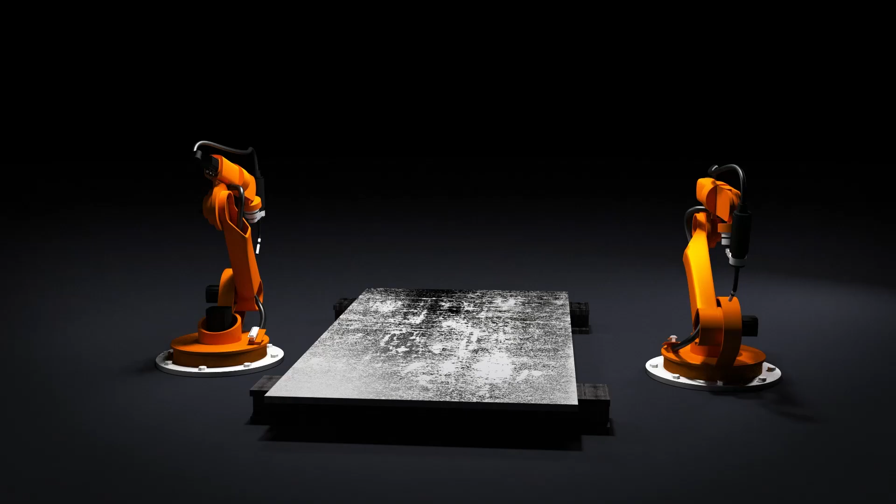All right, it's go time. Spa sign at the Agua Caliente Cultural Plaza.

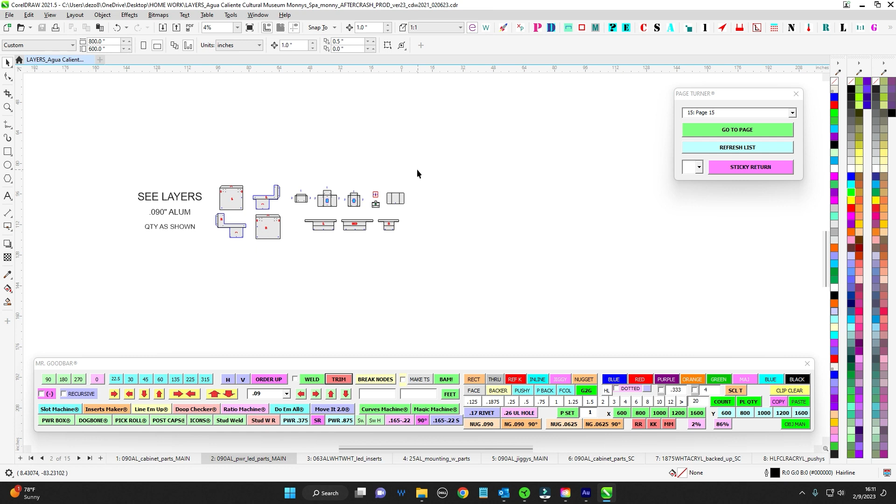Let's get it cracking, do some lay of the land. We've got the frame parts, 090, nothing too crazy there. We've got some new kind of weird power stuff I'm going to go over, some weird little LED holders, and a switch birdhouse. Just keep an eye out for that.

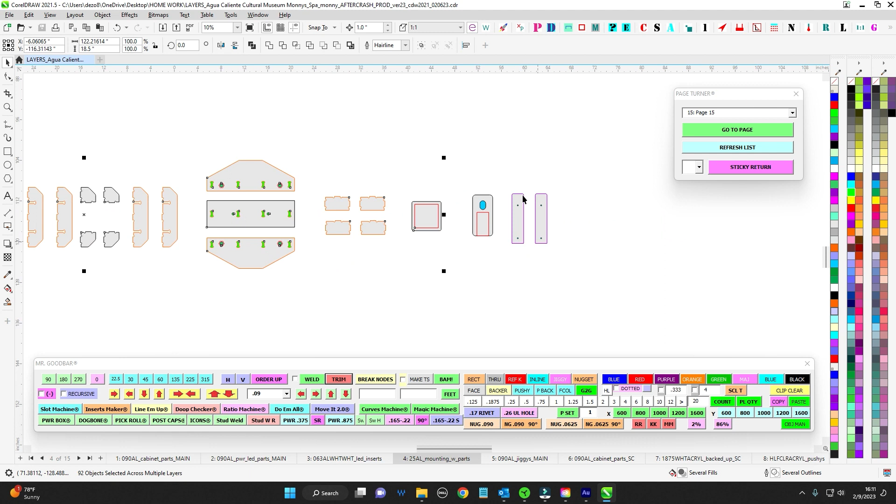We got some 063 white, only need it inside the one part. We've got basically the base parts here, then we've got a lift point, and then a couple of little guys for holding on the little sidecar there.

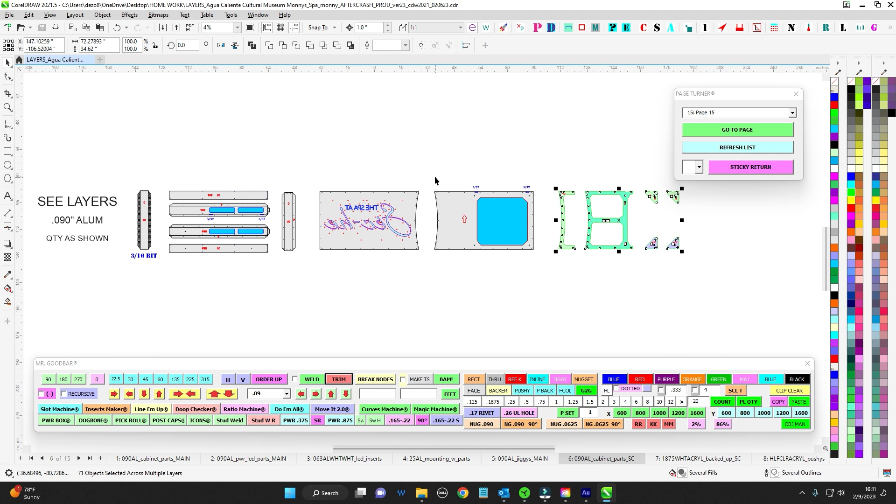Keep an eye out for those, we got a separate page. This is just the jigs for the main box, and then the sidecar slash, it's almost like a blade sign, that's what I'm calling it, both there. But you got everything you need for this - you got your jigs here, your skins here, all on this page. You got the frame parts, keep an eye out for those.

And then the blade sign sidecar is going to be backed up plex, so it's just white acrylic, that's all you got to worry about there. And then the actual cabinet, the letters there are push through, so you got 1/2-inch pushies for the cabinet. And then of course get these to first shop.

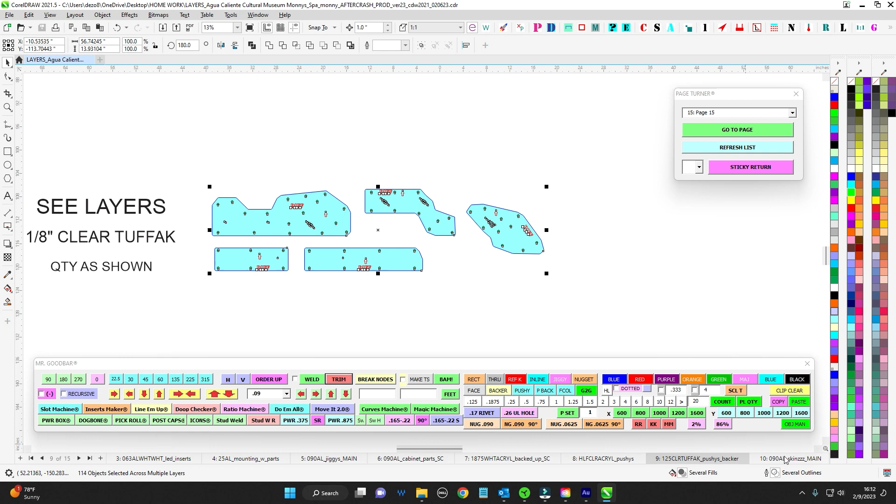You got your polycarb backers there, and yes, I'd like them to be 1/8 inch. I went ahead and put the skins for there because they're one piece, got the skins for you for the main cabinet. And then the top little logo is trimless, little trimless can, and the 3/4 inch clear like we do for that trimless stuff. So let's get into it.

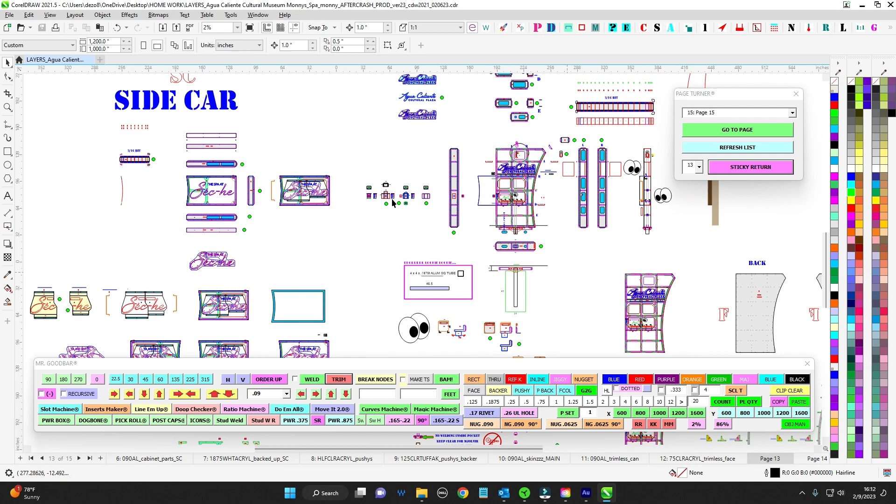So I always say, yeah, I'll try to go over it and make it short, and then I don't. But I believe this one is going to be pretty good, we're getting really good at this, so it's not too much weirdness. It is asymmetrical, so it's only single-sided - some of the stuff is different on the front than it is in the back.

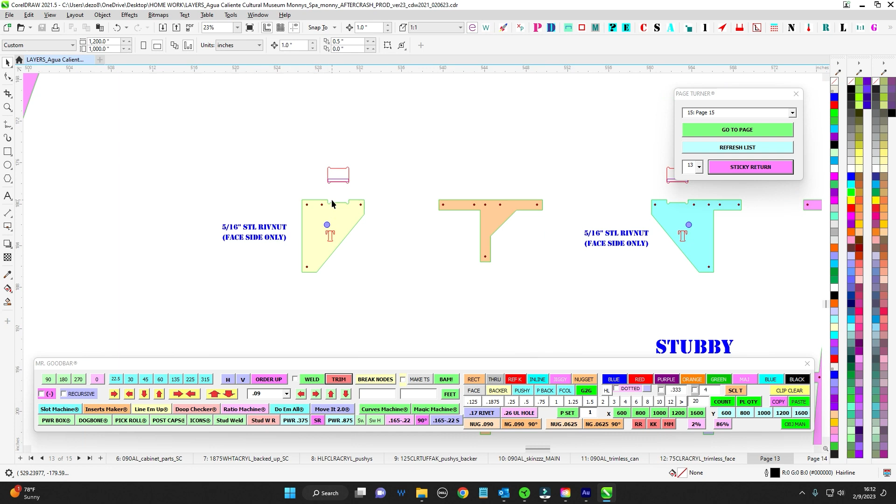I try to make the jigs universal though, so you'll have holes for riv nuts on the back that you won't use, so don't bother. And then like the notch and stuff for that is not going to be there, so don't worry about that.

And while we're here with jigs, you've got two little stubby guys - so you have these ones here, the kind of tan color. Those are all the same size, but you have two stubbies in order to clearance this curve. So just look for a notch right here, and that'll give you your stubbies. The notches and stuff will let you know the difference.

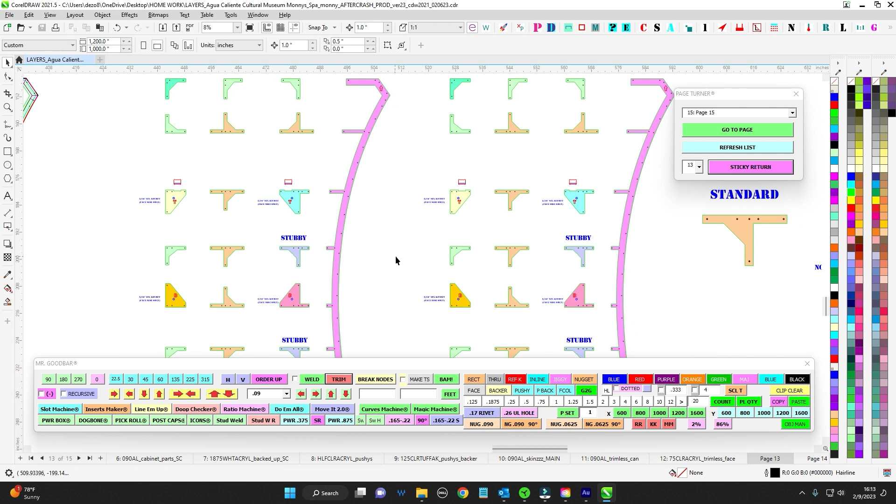Eventually, once we figure out the technology to get colored aluminum, then we can route the color of the aluminum to correspond to my pictures, and that way it'll be a lot easier. But for right now, we don't have any pink aluminum or purple aluminum, so just look for the notch on those, but otherwise it's all good.

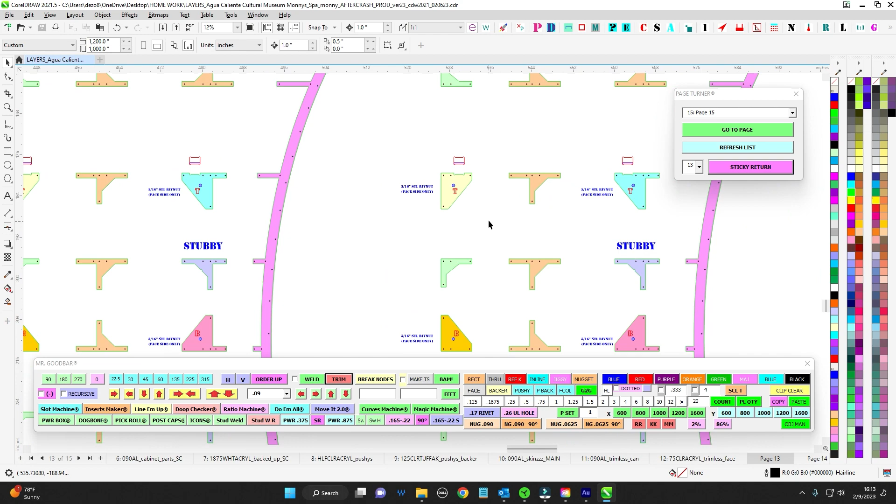But like I said, on the face side, you'll do your riv nuts, but don't worry about the back. That way you wouldn't accidentally put the wrong one in the wrong spot. So that's all, the frame is the frame - you guys are getting really good at that. So go ahead and just construct the frame, but leave faces off for the moment, but get that all done.

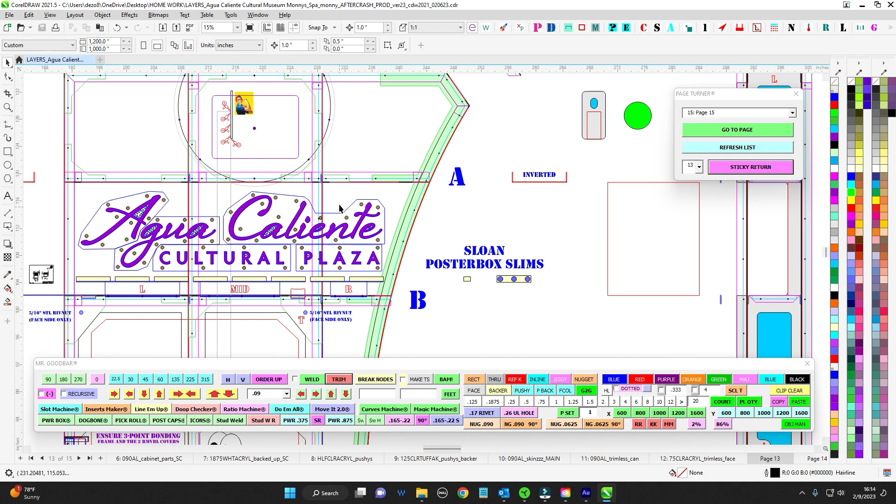Sort of like the Loma Linda Monument, I kind of made a cavity here that will exist in this spot right here. So that way just the back has the thing for the lords, and then the front, you'll have a front cavity that'll be completely open for the pushies. So that's where that is.

And then you'll have the openings on the skin, but that's basically where all the power is going to go and stuff like that. Make your birdhouse like you do, and go ahead and lords it or tack it to the inside, and then that's good. And then get that frame done.

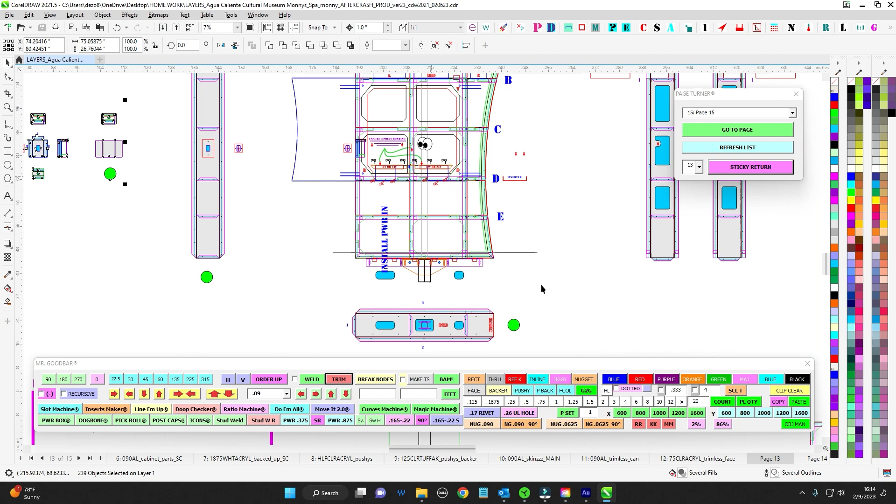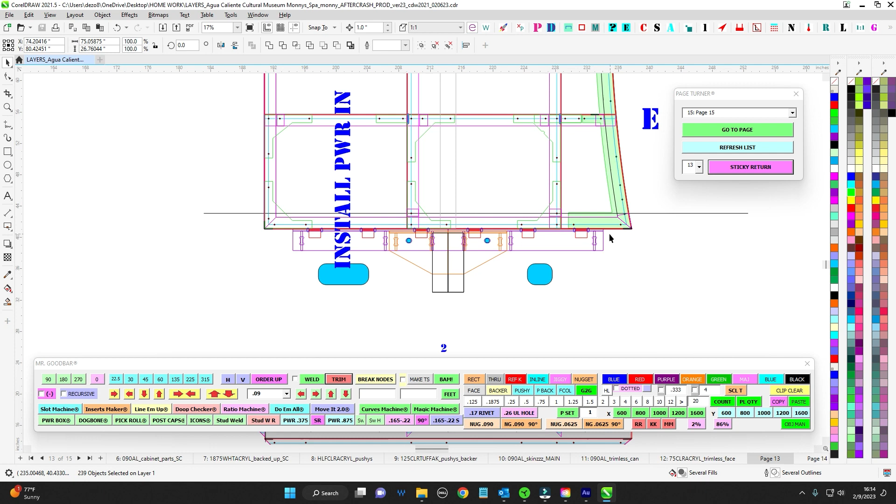And then you're going to make sure that the lift point is burned really well, and it's going to be a single stick of 2x right up the middle, and then you're just going to burn the lift point. So you want to make sure the lift point's burned on there really well, so that way it's nice and strong.

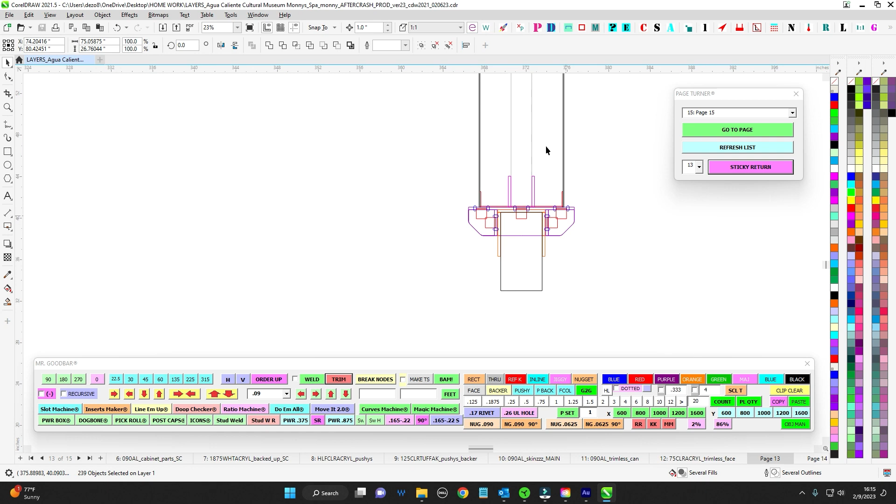Just like that, and that's going to go all the way down, and then you're going to burn it really well to the base plate. And by then you'll have the frame made.

Go ahead and lords that to the base, and then the base, how low can you go? That'll just stay on there the whole time, around the shop and everything.

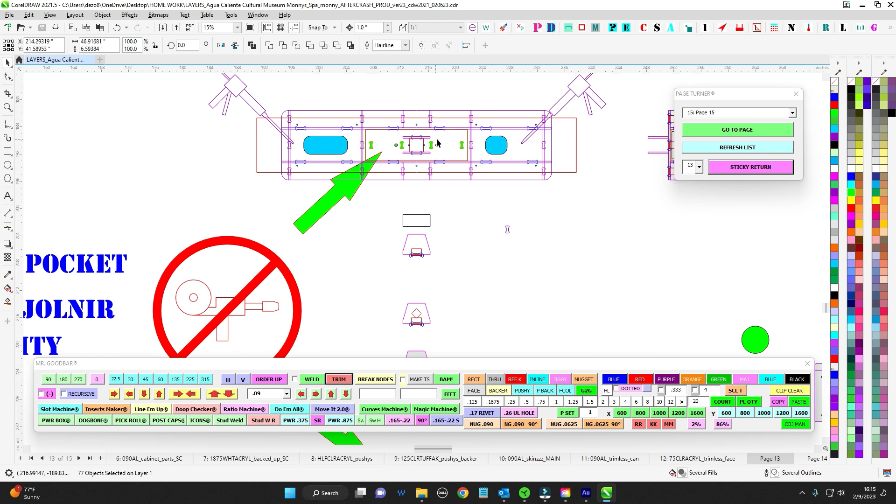So, and then the Mjolnir, you'll actually just weld that together. You got 1/2-inch nuts, but again, make sure you don't weld in the pocket. Keep the pocket clear of welds, make sure there's no weld boogers when you're done, make sure it's clean. That way install can slide that up in there and be done with it.

Yeah, so permanent base, stick up the middle, all good.

Oh, I just realized I'll owe you, I got the cut sheet here, but I owe you this stick here. So I'll get that laid out. Looks like it's 88. But yeah, I'll go ahead and get that for you.

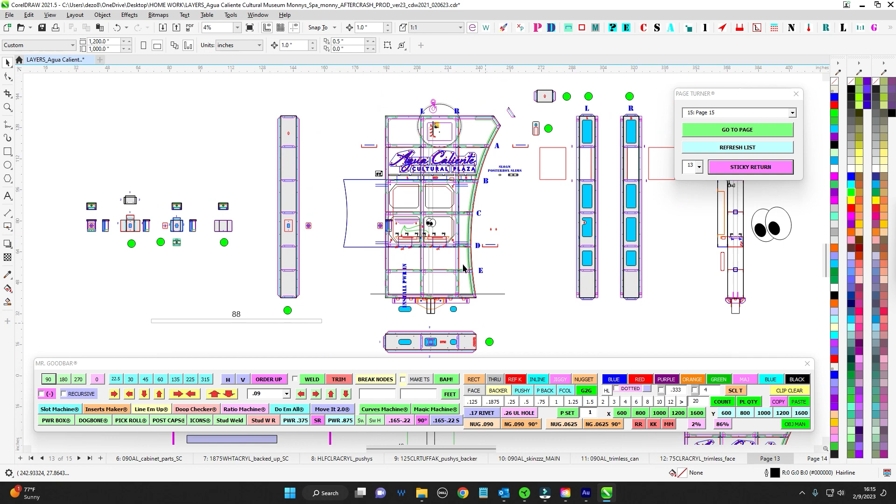So make the frame, all that's good. Now this guy here, you can make this completely on its own. It's, like I say, it's a 5-inch deep box. Got a little curvy over here, but otherwise it is symmetrical.

So the back has a big old opening for you to be able to slide in all your LED stuff. This will also allow access to certain things. You'll see what's up. The face, again, is shoot studs.

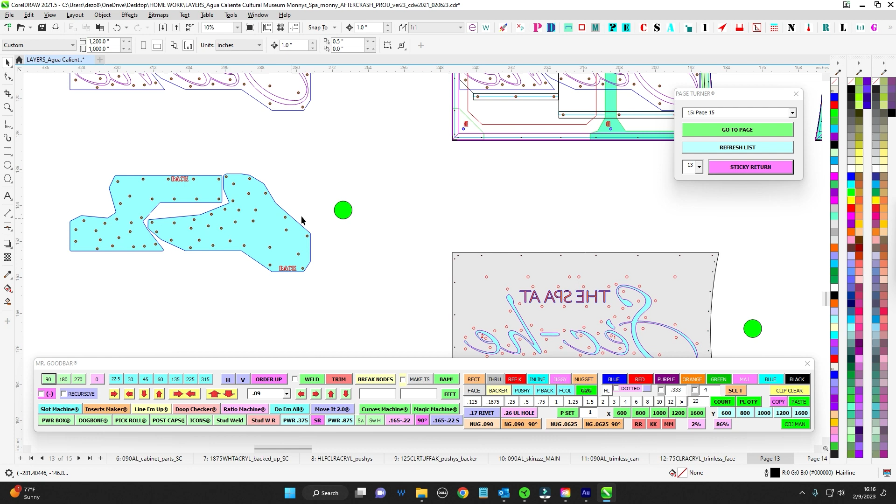This is backed up Plex, so it's just white Plex. Don't have to do anything to it, but keep it clean, no scratches. And then the top row of studs will be where you go ahead and nail down your whites.

So you got some reverse bends here, you know how we do reverse bend that, but this over here, you'll do your LEDs. And then when it comes time for assembly, you just try to puzzle piece, get them in there as best you can.

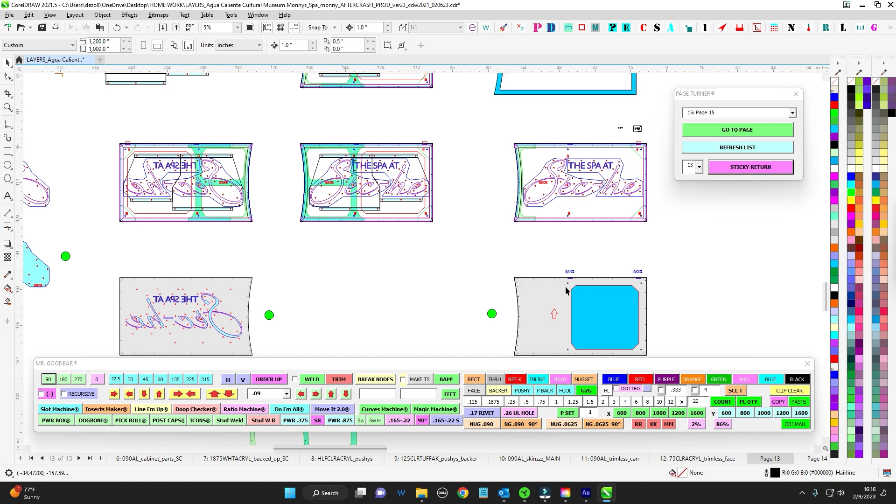These are 3.5 deep, this is 5. So it's a little tight, but I think you'll be able to get it done.

And then that's that. So like I said, just make sure you got the back jigs. The back jig is a little different because it'll have where the 5/16 go, and it's notched here for the little pieces sticking out. I'll show you that. But your front one is clearanced for the backed up.

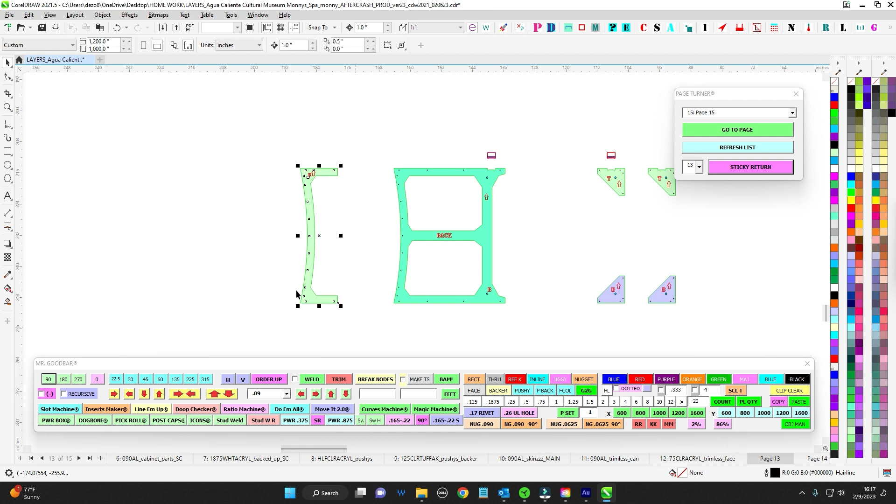And again, the jiggies should be different, but just so you don't accidentally put the wrong one, just ignore the holes and everything. It's fine.

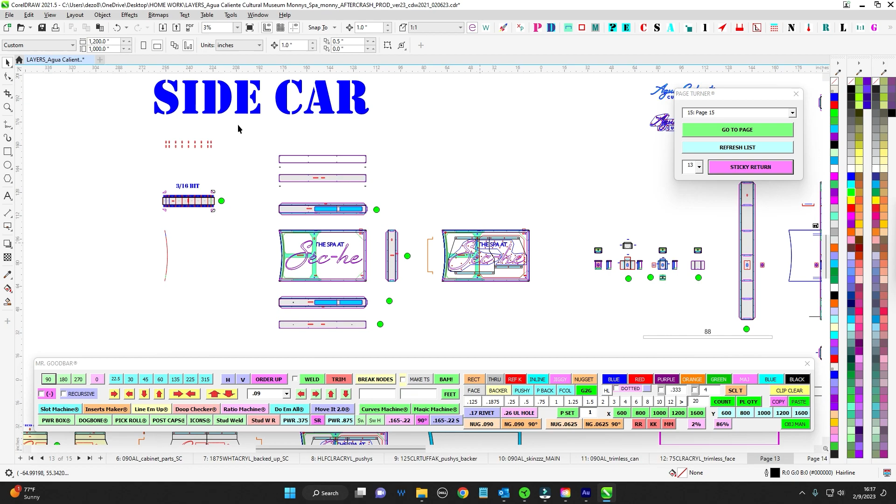So then what you're going to do is once you get the frame done, you're going to make sure that you do on the face side. Again, don't worry about the back side, just redundant holes. But this side, go ahead and do your 4 5/16 steel riv nuts on the jiggies. And then that will be where that blade sign / sidecar hangs.

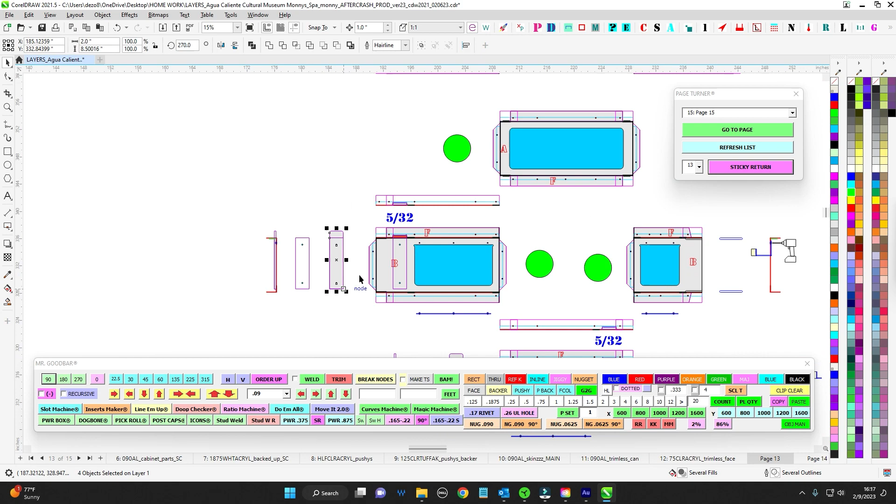Now you'll take those 2 sticks of 1/4 inch. We've done this before. It's going to poke out on one side. So let's go to my side view over here.

Yeah, so you can see the purple, it'll just poke out just enough. That way install can take, so I expect this not to be on for install. They'll just take this over as it is, with the base and everything, put it in, and then they can slide this on, and that just helps level it, keep it good.

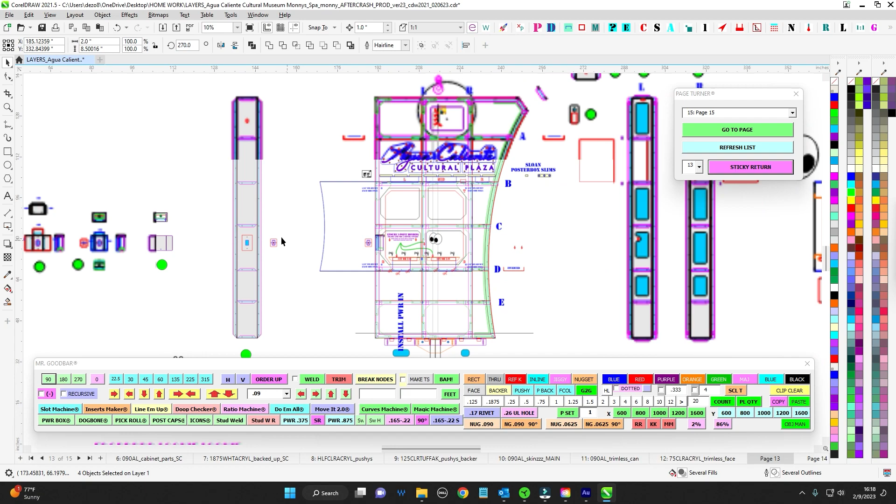And then they'll be able to reach in, take the top panel and the bottom panel off, and there's plenty of reach in there. You can reach right in there and hit those with the 5/16. So that'll hold that on.

So like I said, not a whole lot different. It's fine, just check all that out.

Let's talk about the trimless while we're here. So the reverse channel style. Take the return, start the seam up here, put it on the backer like a reverse and weld it like we do. I gave you +3 so you can chop it and make it nice.

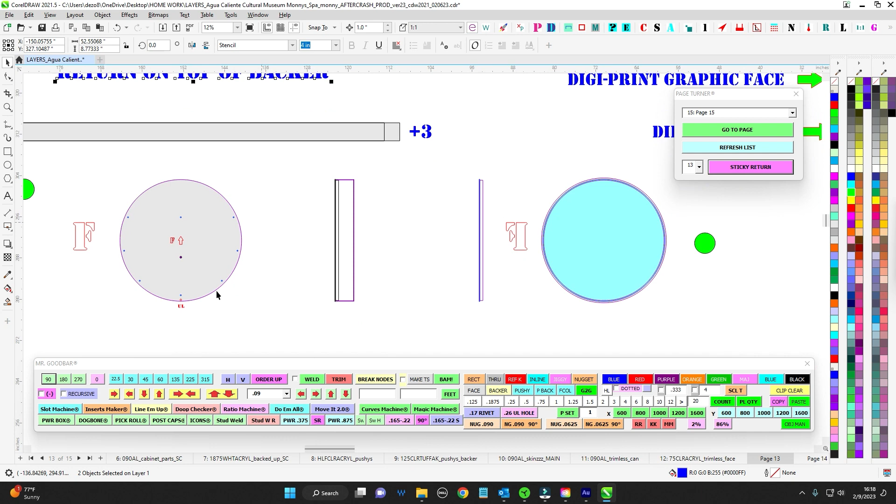Go ahead and drill a UL hole on your own because I didn't know where it would land. So, but make sure, there's your reference mark. Put a UL hole, keep them happy. So we're going to do that.

You know how we do the trim, so this is a number 6. Keep it to the back, watch the shadow. But this will give us, let's see, we'll go to the back page here.

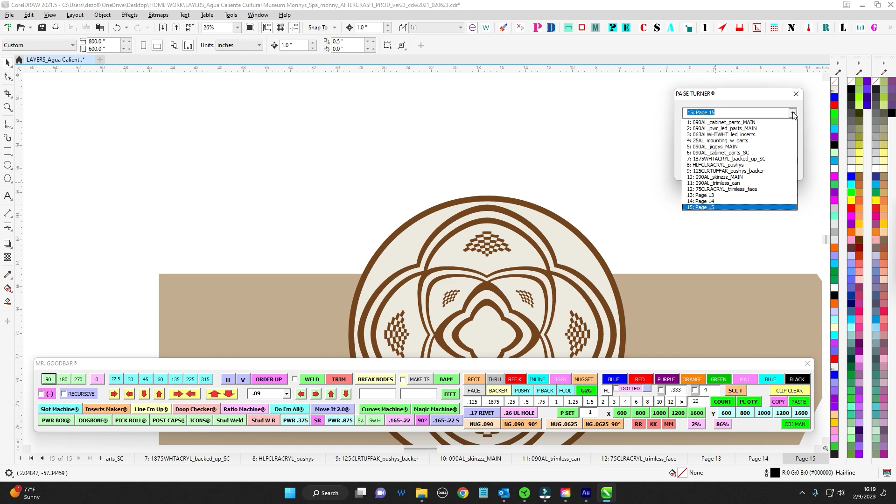So this is a graphic on the front, like we do digital print, and it's this sort of brownish color or whatever it's going to be. But that's going to give us a glow ring, and Jim doesn't want a glow ring. I mean, it could look good if you wanted that, so you're going to have to coordinate, Jonathan, Adrian, whatever, coordinate with John G or Pete.

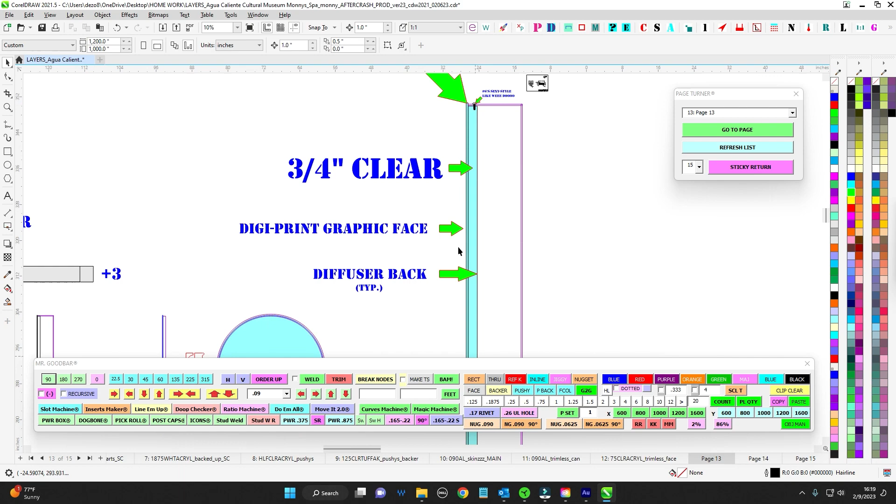So we just need to opaque this. I know we've done this before. So either get it masked and painted, or maybe we could do a surgical wrap in vinyl just to lay it around and make it look good. But anyway, just this spot right here, we got to make sure it doesn't glow. Otherwise it's diffuser on the back like we do, nothing different. So watch out for that.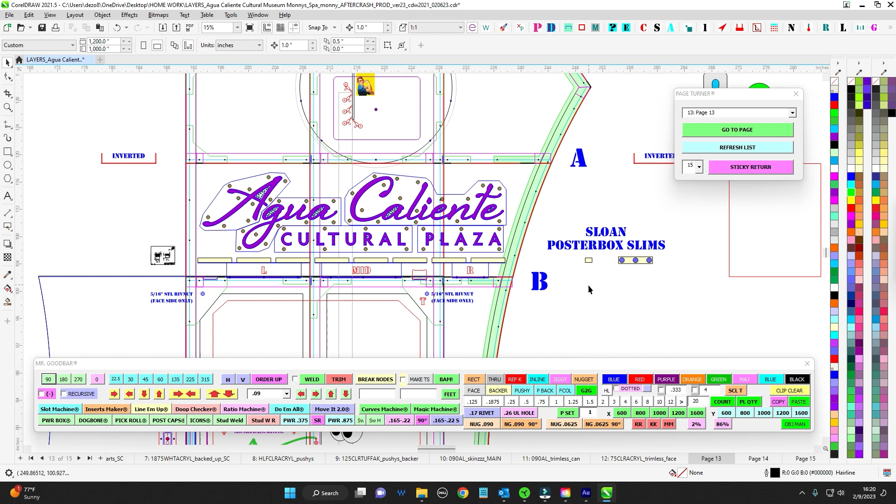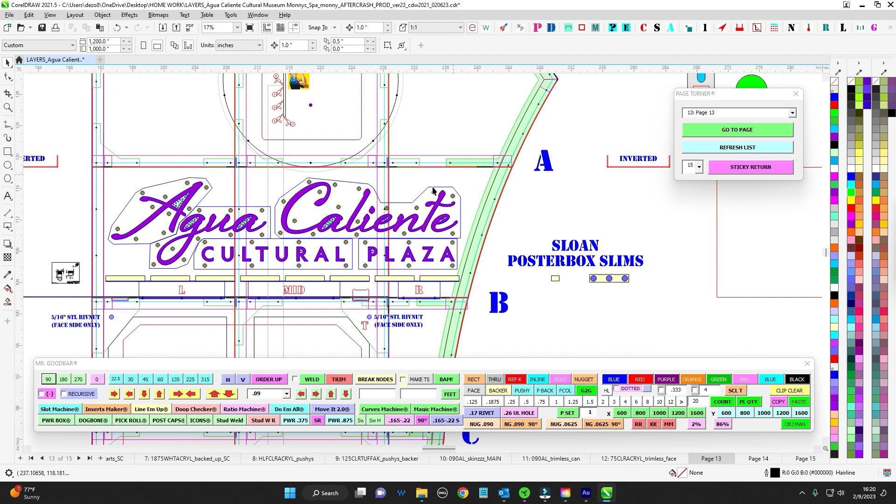Closing in on it here. The other thing will be, it's just a matter of access. It's tough because this thing's only 8 inches wide, and to get the pushies in, this is really the problem area. So what you need to do is make sure you leave a little bit of lead time after paint. Give yourself some runway to have a little bit more time to assemble, because it's not going to be fun. From these jigs here, you've got 16 inches to get to here, or you can come in through here. But again, you're going to be reaching up trying to get to this. So this is going to be a little pain in the booty, but once you get it in, that's fine. So just leave time for assembly.

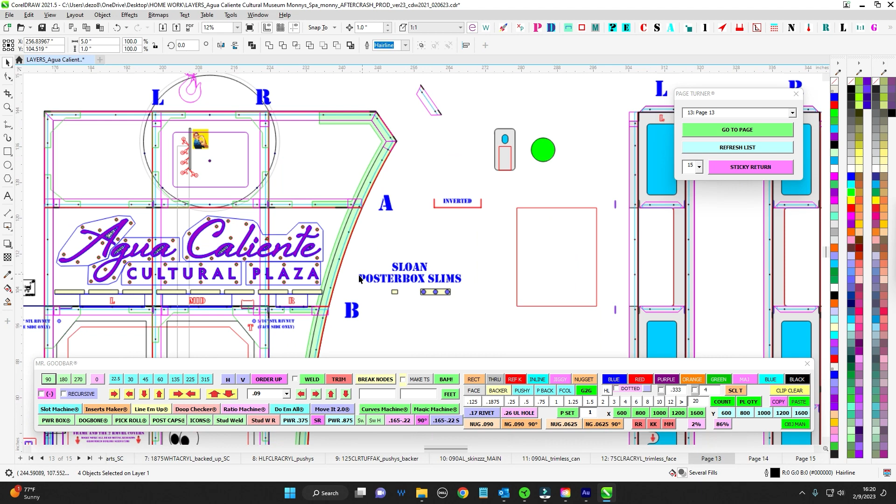And then I asked you about those poster boxes. So this is what we're going to do. I originally was trying to put some white in here, but again, zero clearance. You've got the pole running up the middle, so your white would be stuffed in here, and then you can't get your hand in there and all that. So I came up with this. We haven't really done this yet, but I think it'll work fine.

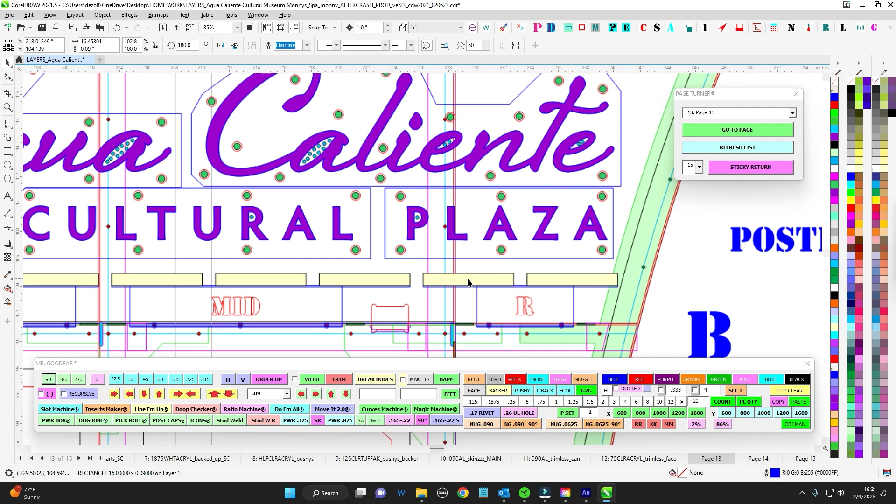So you're going to be doing this, I ordered these in. I think we got 8 of these little pucks. As you can see in blue here, each of these are basically laid out to the length that they need to be. You've got mid, right, and left over here. So you got 3 pucks, and then you can put 2 pucks on this one. And then you can see where the holes are - those are going to frap from the bottom.

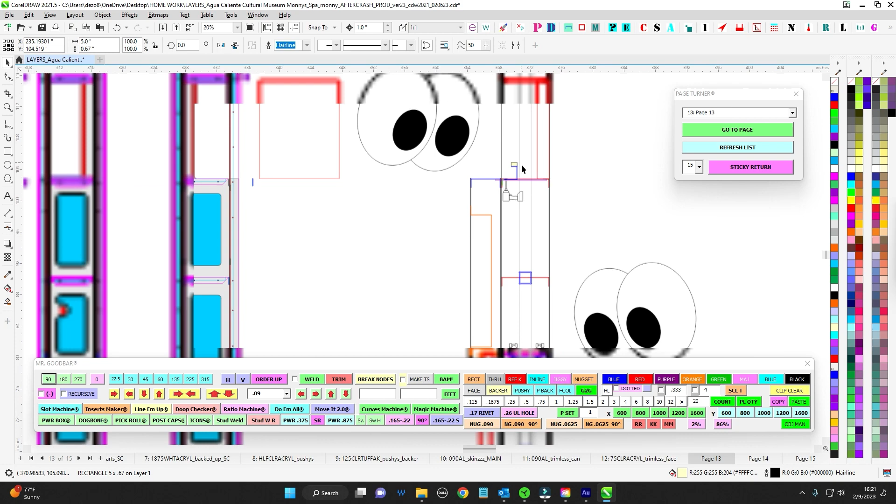So once you get everything all assembled, go ahead and stick these pucks down on each of these little tray things. And then there's sort of like this little bent one piece. You're going to come in from the bottom, and obviously the sidecar is off, and you'll just frap those in place. And then I think we'll have good side wash all in here, so I think that'll light up properly with the pucks across, side wash.

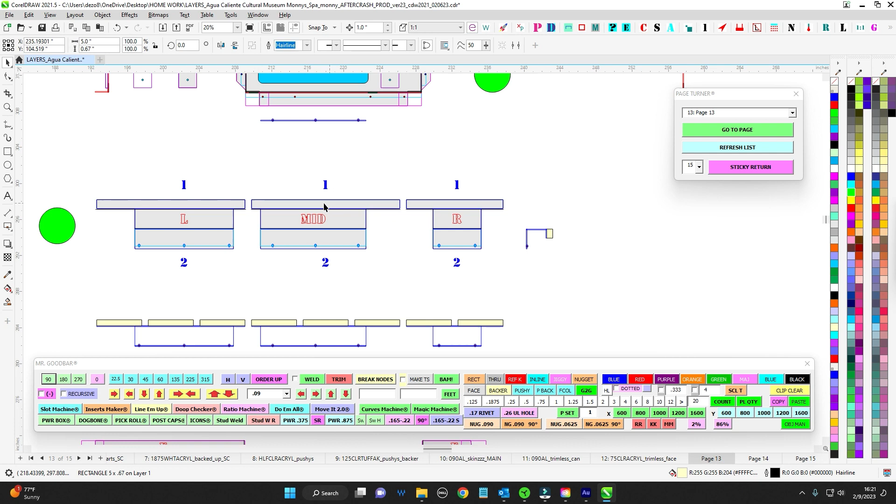Those guys are up here. So you can see it's pretty simple, pretty straightforward. The pucks will fit just on there, so 3, 3. Go ahead and put 1 puck on the end and 1 puck on the end, and then split the difference, and do the same and the same. That should line them up all nice, just like that. You can see where they frap, and then they correspond to this notch, and then there's your 3 holes to hit.

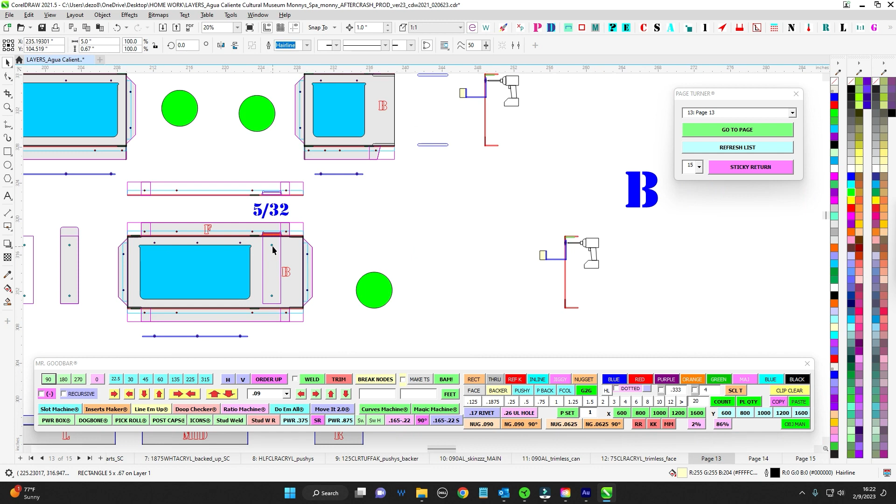Also, you can see where I have the different letters, A, B, C, D, and E. B is the one that's busy - B has all of it going on. So B has these things going, and also it has the little pokey outy things for the blade signs, sidecar to rest on. So make sure those, I got 5/32s, put that 1/4 inch, tack it up nice, make sure it pokes through, and we're all good.

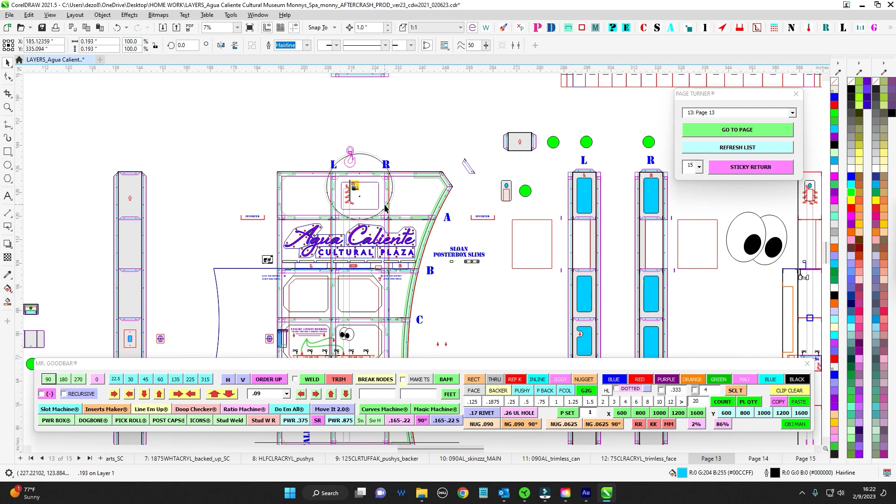So that's what you're going to be aiming for. Again, that's what you kind of want to save a little bit of time for. Make sure you run your leashes and all that, so a little bit of after paint time, make sure everything's all good. You'll get your leash down from here, bring it down, and then this is sort of your collection point. So I'll go over that. But I've got the poster boxes, got that. Lift points, good there. Base and everything.

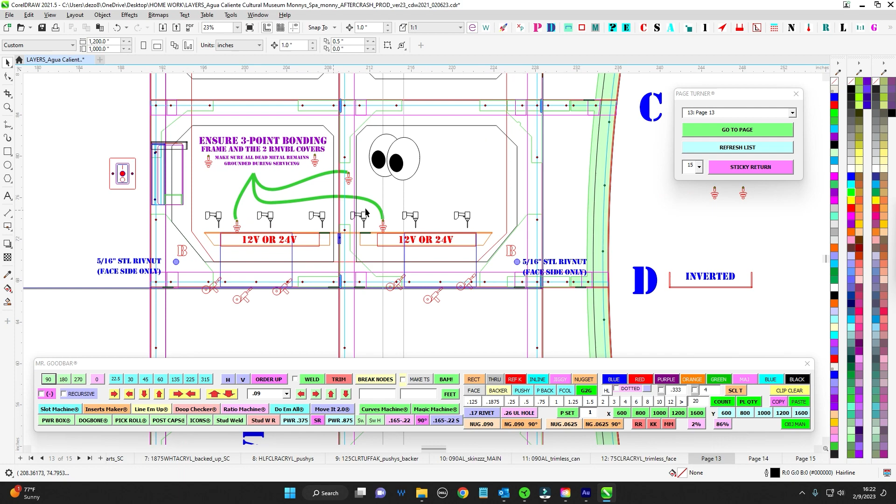So yeah, let's go over collecting, final on our way out here. So another thing is there's no access. I could put power supplies up here, but now you're trying to run - how do you get to this switch and then run power back up? And we know that power is going to be coming in through here.

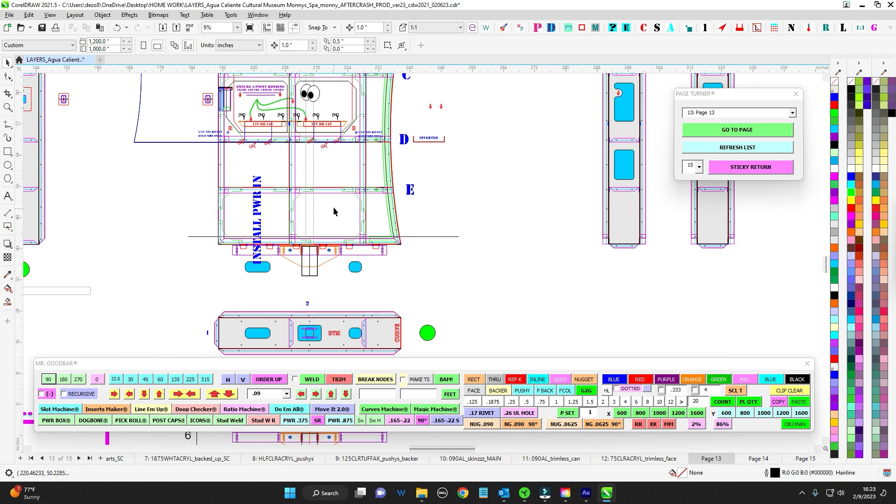Install, you can come through here, but the hole's a lot smaller because you see where this frame is—that frame cuts that hole. So if you have to, you can come in this way and then feed it to here because you have openings and you can make your way through.

But I see you have a nice hole on this side to come through, and I'm imagining install power coming here, so I was kind of wanting all the primary to end right here. So I came up with some trays that we haven't done yet.

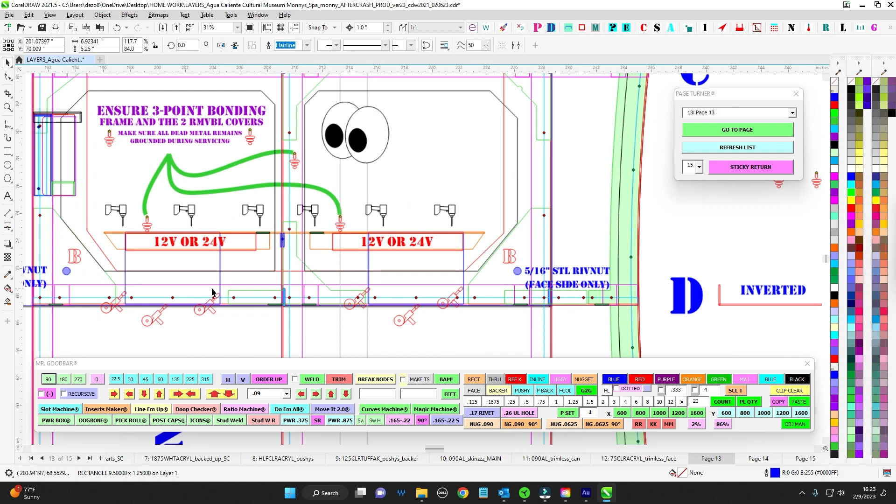They're a 2-piece design where you can see where the blue line is and the welds here—those are going to be permanently mounted. Let's go to the side view. Those are going to be permanently mounted to the back of the frame, to the back side, and then they're going to stick out. And then I also have them, they actually attach if you want.

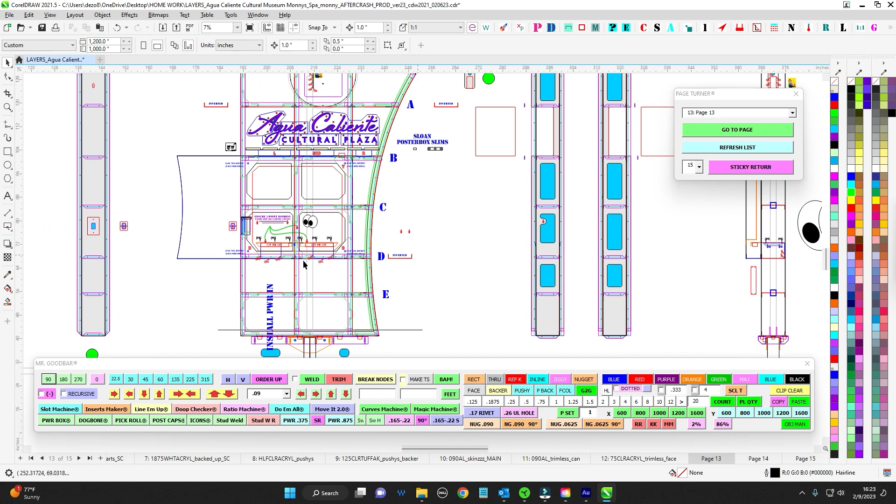They sandwich this guy right here, right there. They sandwich the holes, and then they'll attach to each other. So the blue will attach and stay permanently, and then you can see where it's like this sort of L, so you can kind of reach in. That allows install to do all their power and whatnot.

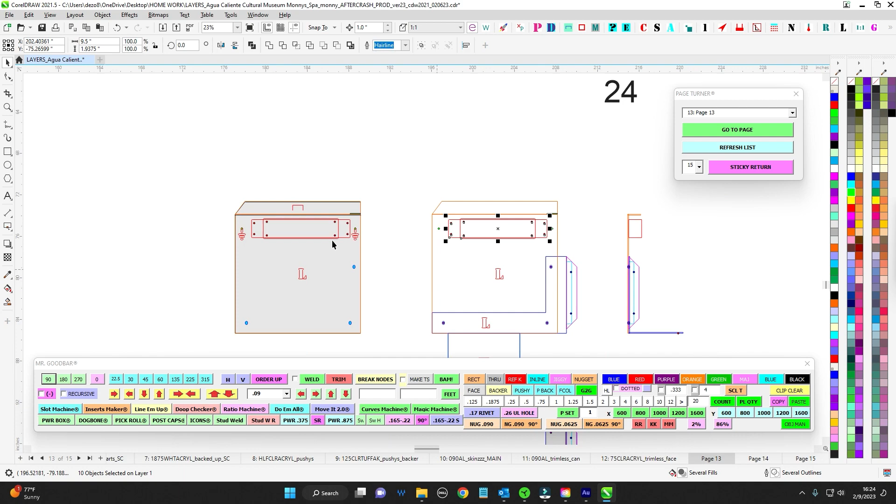And then what you're going to do is on the underside of this, either a 12 volt or a 24 volt, you're going to mount it underneath upside down, and then that's going to create watershed, and it's going to hang upside down, and then that allows them to access this later.

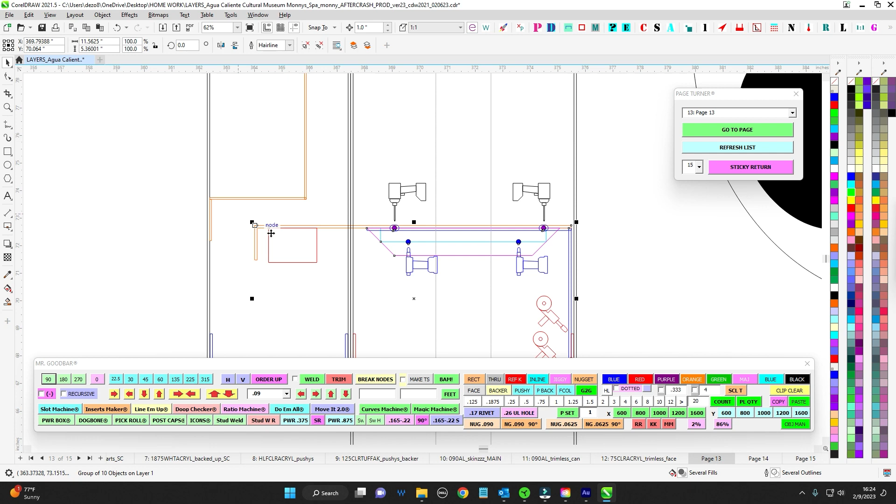So because I thought after we put the sidecar on, it's kind of hard to access things, kind of difficult, this allows—you can see where the orange is—the orange allows the power supply to jut out, and then later on they can just take this panel off. I know it's only 2 feet up, it's kind of tough, but you can go up underneath, and this allows a quick change of the power supply without having to disassemble the sign. You can see where the white is just clearance.

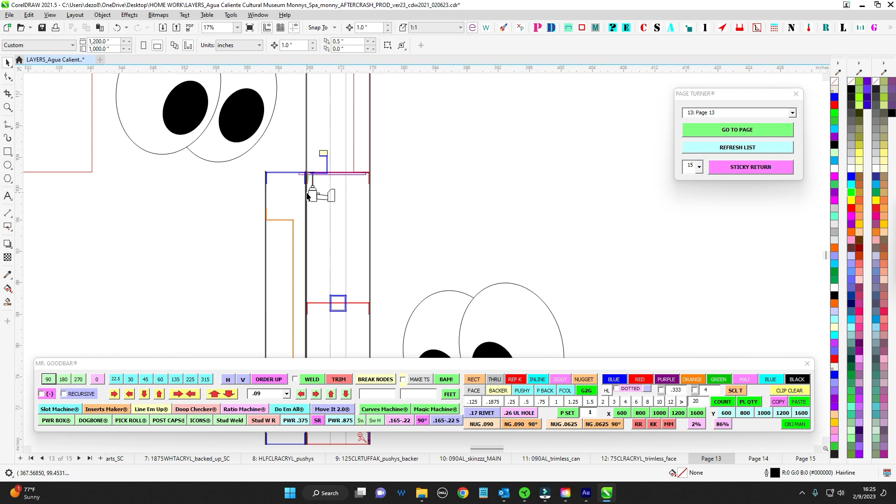So this will be jutting out and all wired up once install's ready to go. Then they'll slide that on, and that should clearance. A little bit weird stuff—like I said, when it's time to assemble this thing, make sure you give yourself plenty of lead time on that. So anyway, so that's that.

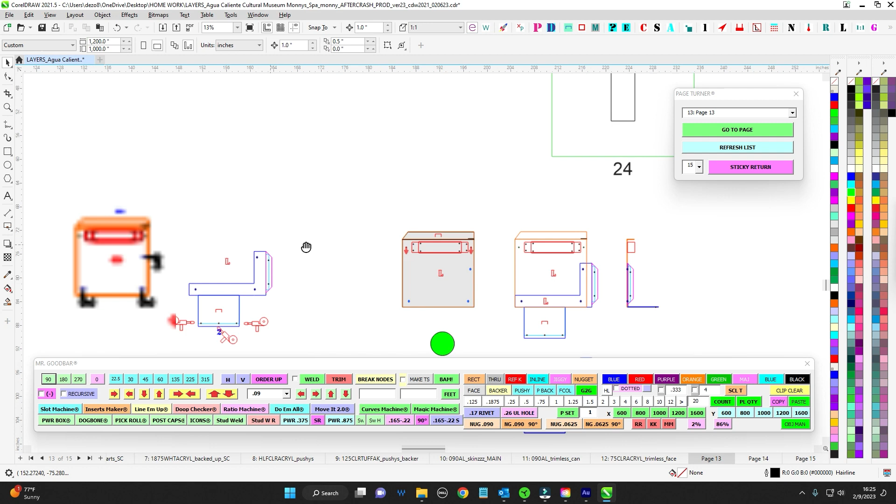But yeah, those little orange covers can come off, and then you have access. Install, that's for you guys right there. Make sure though that these are really properly bonded. So whenever you have the live power and then you basically disconnect it from the sign's live.

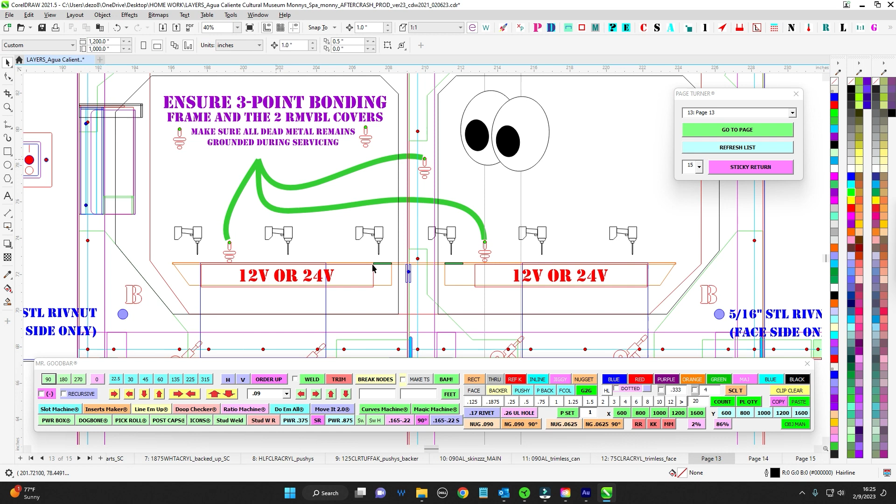So make sure we have 3-point bonding. We want to make sure the frame is bonded, bring it over, make sure this guy's bonded, bring it over, and this one's bonded, and then that goes to install, that goes to your main green ground wire for the sign. So you want to make sure you have 4 points there with the main ground.

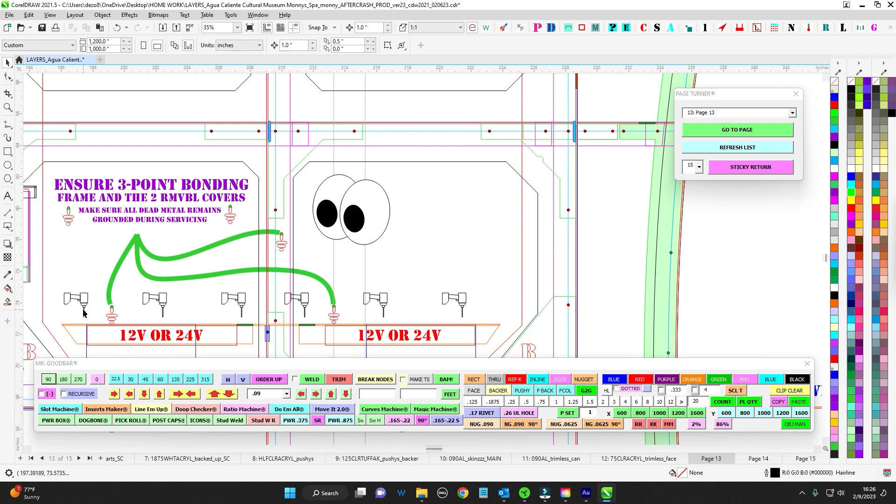So that's that. Otherwise, install, when you go to install this thing, you just slide it on there and let it sit, line up. You'll have 4 5/16 bolts, put your covers on, but it's all good.

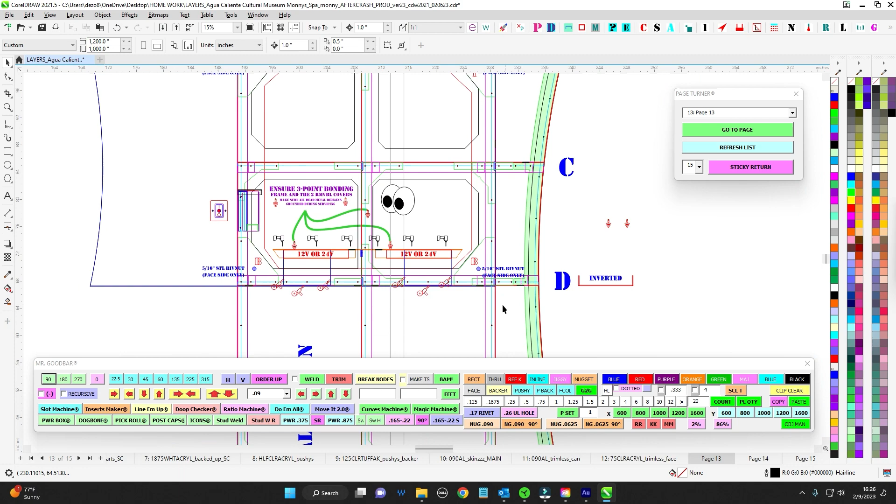The one thing that concerns me a little bit is just watch out for light leaks. I don't think we should have an issue because we have a pretty good flange here—this flange will cause a pretty good shadow, but the white on white is open on that side. But it's actually pretty far away, so you can see where the light's here, and then you have this much overlap.

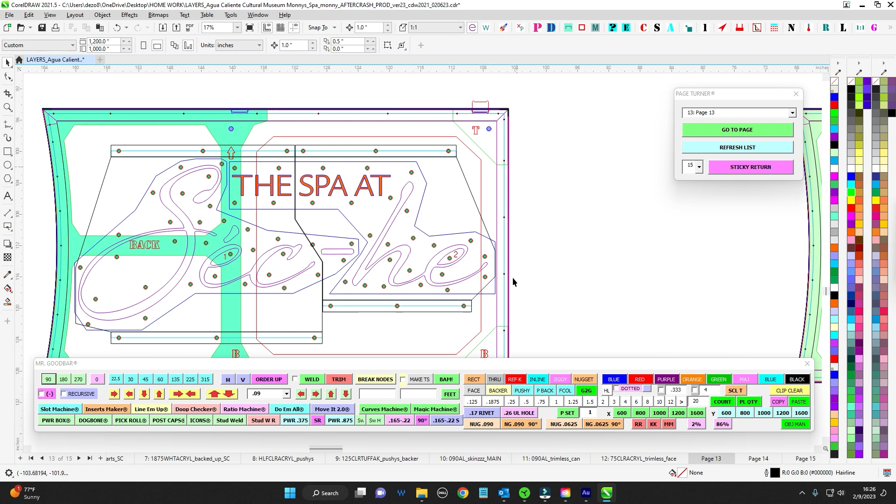Photons aren't really good at turning a 90 and then shooting out, so I don't think this will be an issue because even though this won't seal per se against the fact that the white is bent here, it should be okay for shadows. There shouldn't be any light leaks, but we just want to make sure that nothing escapes around the cabinet once it's done onto the other cabinet. So this could potentially be a little bit of a problem, but we'll just watch out for that.

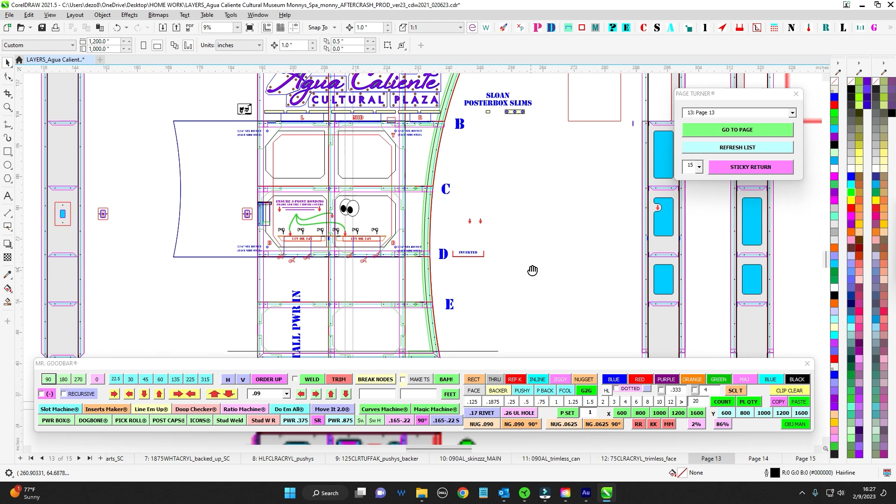But otherwise, it's a cabinet. Just got a little curve, but we're all used to all that. So I think that explains everything. I think you guys got it. If you have any questions, hit me up.